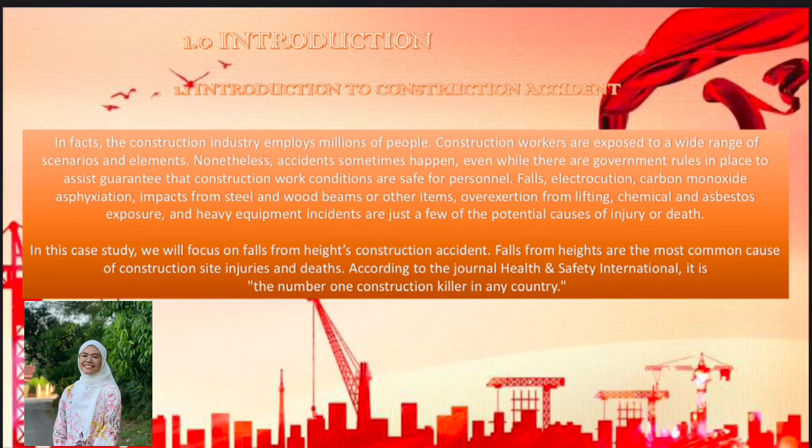In fact, the construction industry employs millions of people. Furthermore, heavy machinery, scaffolding, and a variety of dangerous power tools may be used by construction workers. Construction workers are exposed to a wide range of scenarios and elements. Nonetheless, accidents sometimes happen, even while there are government rules in place to help guarantee that construction work conditions are

safe for personnel. Falls, electrocution, carbon monoxide asphyxiation, impacts from steel and wood beams or other items, overexertion from lifting, chemical and asbestos exposure, and heavy equipment incidents are just a few of the potential causes of injury or death. For this case study, we will focus on falls from height construction accidents.

Falls from height are the most common cause of construction site injuries and death. According to the journal Health and Safety International, it is the number one construction killer in any country. Construction sites are particularly exposed to this danger. Other companies and workplaces have considerable fall and high injury incidents due to workplace slips and falls, while some organizations and office sites have a lower risk of serious harm than others.

The risk of injury must be considered. Employers who are responsible will analyze the risk of falling from a height and evaluate methods to reduce the risk of falling from a height.

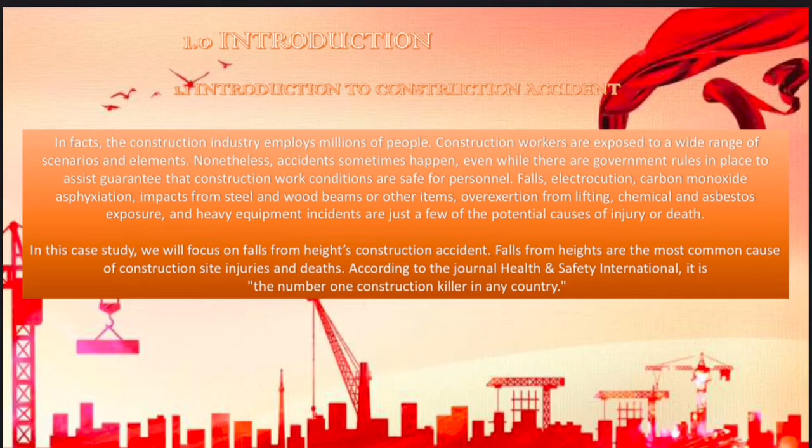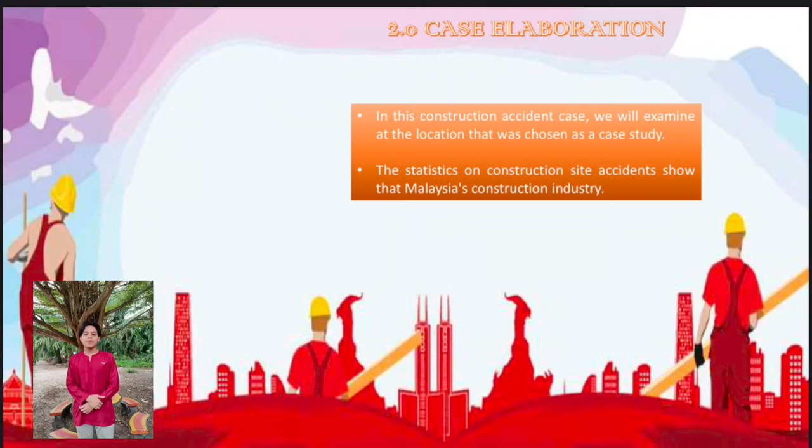Case elaboration of construction accident. As a result, construction safety continues to be a problem and a challenge for researchers and practitioners. As a result of the construction industry's poor safety performance in Malaysia, both society and the economy have incurred human and financial losses. Furthermore, in this construction accident case, we will examine the location that was chosen as a case study. The incident, for example, occurred in Kangar, Perlis.

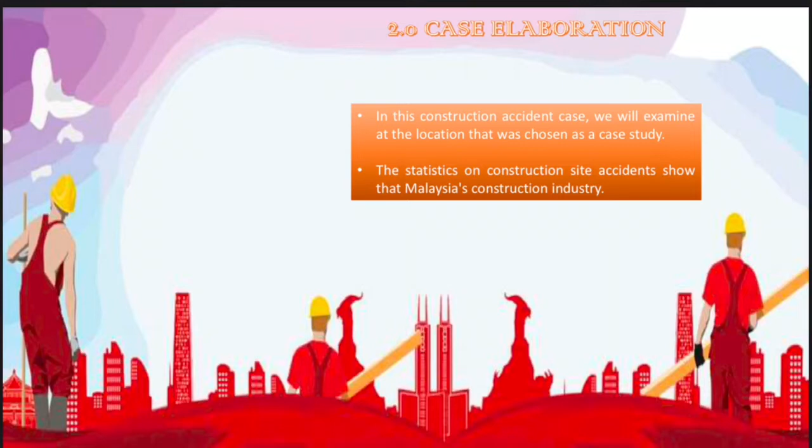According to the article, on Monday, a Bangladeshi worker died after falling from a height of about 7.3 meters while working on a water tank at a construction site in Bukit Chabang, September 2. The victim was securing a formwork pillar during the 4:45 p.m. incident, according to the Department of Occupational Safety and Health, DOSH, on Wednesday, September 4. The 34-year-old was then transferred to the Tuanku Fauziah Hospital, where he died at 6 p.m.

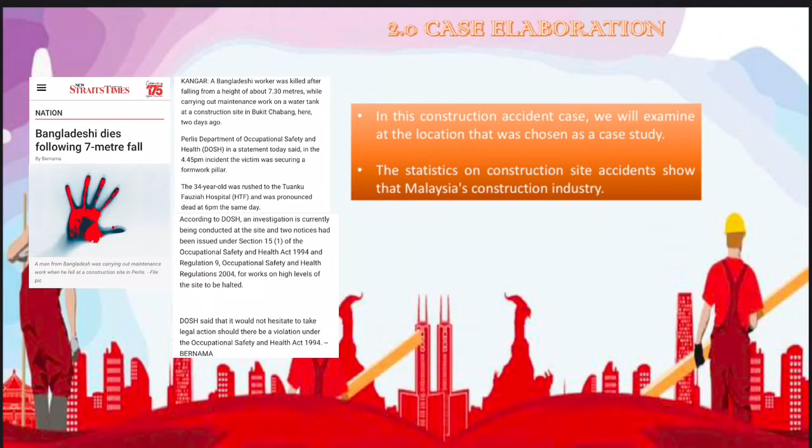the same day. DOSH said an investigation was underway at the site, and 2 notices had been issued under Section 15(1) of the Occupational Safety and Health Act 1994 and Regulation 9 of the Occupational Safety and Health Regulations 2004 to stop work at such height levels. Should a violation of the Occupational Safety and Health Act 1994 be found in this case, DOSH stated that it would not hesitate to pursue legal action.

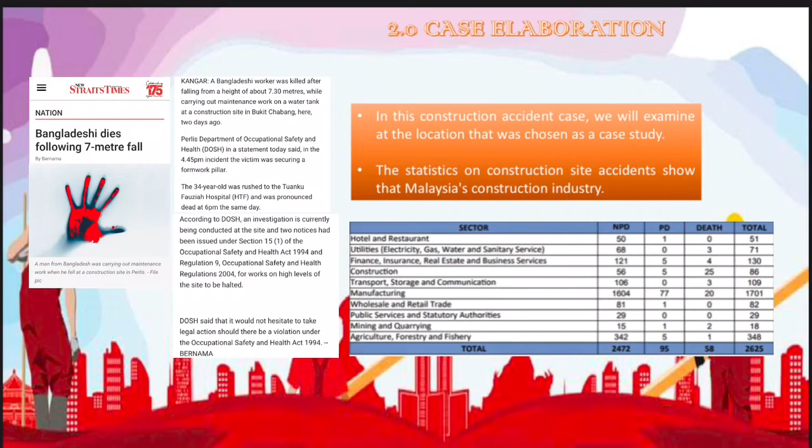Next, the statistics on construction site accidents show that Malaysia's construction industry is one of the most critical sectors that requires a major and immediate revamp of current site safety practices. According to the Malaysian Department of Occupational Safety and Health, DOSH, the construction industry had the highest number of fatalities in occupational accidents during January to April 2021.

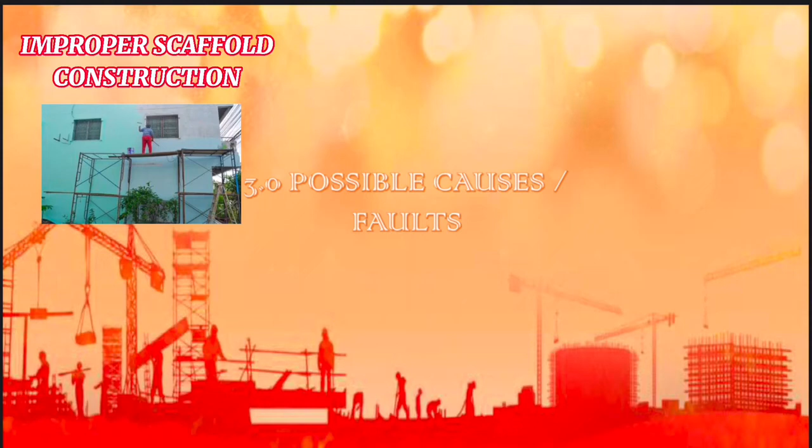In this case study report, there are several possible causes of the fall hazard incident, which may be improper scaffolding, not wearing fall protection, unsafe ladders, and weather conditions. The first possible cause of the fall hazard incident is improper scaffold construction. In construction sites, scaffolds are not usually properly constructed.

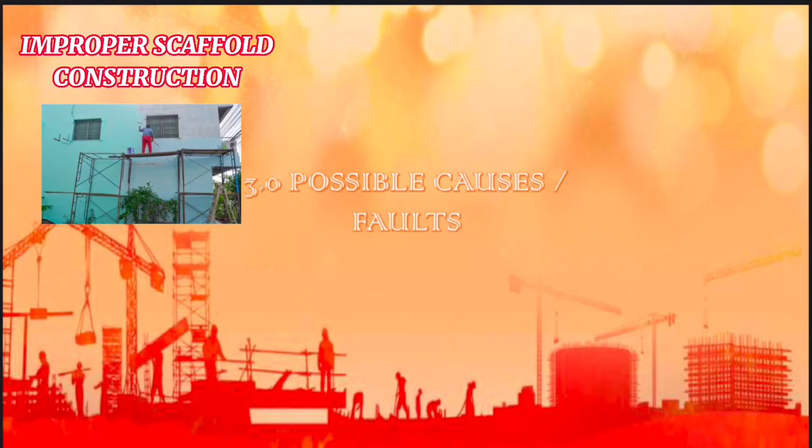One factor of improper scaffolding is side or wall openings that are not protected. When the sides of a scaffold are not properly guarded, employees who come too close to the edge are unprotected. Besides, another factor of improper scaffolding is steel rebar that has not been guarded. When the rebar is not properly capped or is not covered at all, the protruding edge might cause a serious hazard to employees.

Clothing can snag and employees might trip or lose balance while attempting to avoid the protrusion, causing them to fall off the scaffold.

Moreover, another factor of improper scaffolding is unsafe braces and connectors. When the scaffolding connectors are not secured firmly or properly, the scaffold stability is jeopardized. A shaky scaffold has the potential to cause workers to lose their balance and fall, or the scaffolding itself to collapse. Besides, another possible cause of fall hazard is the worker not wearing fall protection.

Fall protection is the most effective method of preventing accidents when working at height. Many workers believe harnesses obstruct their ability to work. When operating at a height, a harness should always be worn, no matter how uncomfortable it is. Fall safety harnesses are essential in the industrial and construction industry when the construction job is over 6 feet.

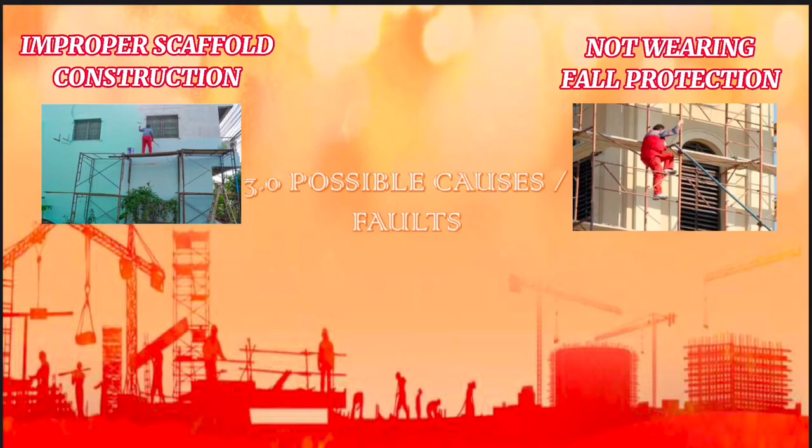It is important to not only wear the fall protection, but also to use it in a proper way. If the worker does not connect the line to a secure anchor point, the harness will not function to protect them from injury. Furthermore, another possible cause of fall hazard is unsafe ladders.

According to BLS data, falls from ladders cause around 100 fatalities annually. Ladder slips from top or bottom, overreaching, slipping on rungs, faulty equipment, and inappropriate ladder selection for a specific activity are all factors that lead to ladder falls.

One of the most common OSHA ladder violations is failing to secure a portable ladder or allowing it to extend 3 feet over the landing before employees utilize it to reach an additional level. And lastly, another possible cause of fall hazard is weather conditions.

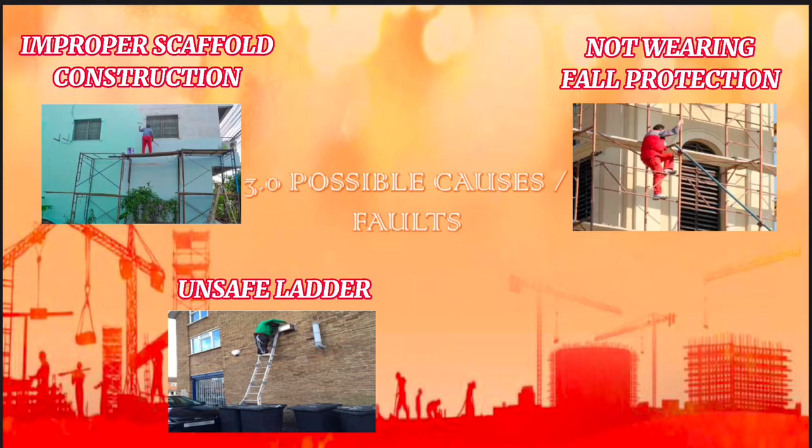All work activity at height risk assessments must consider the probability of inclement weather and its effect on the safety of the worker. Heavy rain or even light rain can raise the potential of slips and falls. Rain can also reduce a worker's visibility, which can lead to a fall when the person is operating in a limited area such as a scaffolding area.

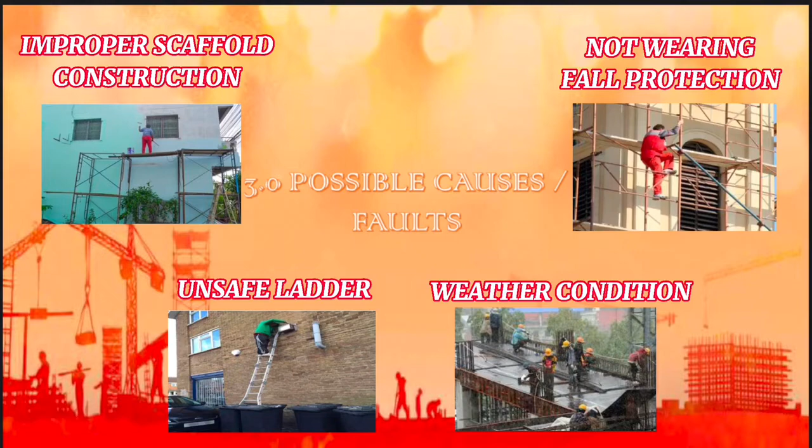Meanwhile, high wind can cause loose couplings on scaffolds to shake, causing the worker to lose balance or bodily support and thus leading to a fall from a great height. According to the Occupational Safety and Health Administration, OSHA, construction workers account for 1 out of every 5 workplace fatalities, especially falls from heavy construction accidents.

Workplace safety rules should be taught to every employee and management. Part of it is knowledge of the potential risks that may arise on their job locations. Therefore, here are some specific methods construction employers and employees may use to prevent accidents in the workplace. Number 1: recognize the hazard and make a plan.

Before beginning any project, the site should be examined for any unexpected hazards. A risk assessment can help to protect the health and safety of workers. Following the completion of the risk assessment, a list of preventative actions should be developed and implemented. It is essential to ensure that all employees receive adequate knowledge, education, and training.

When working from height, employees must plan projects to guarantee that the task is done safely without any accident. Begin by determining how the project will be done, what tasks will be required, and what safety equipment will be required to execute each job.